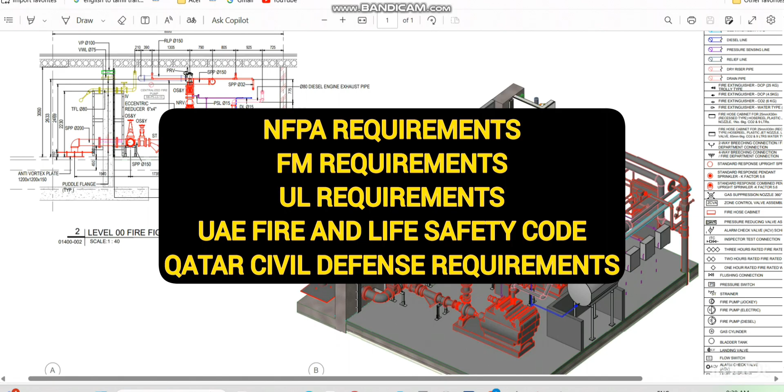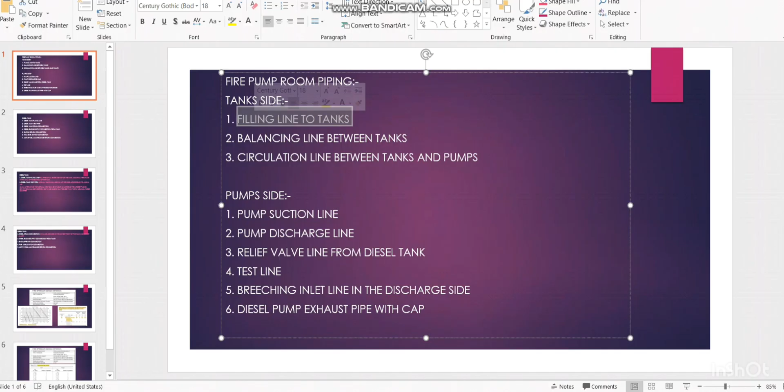When coming to the fire pump room piping, we normally find these type of different piping. For example, coming to the tank side, we have the water supply filling line which is given to the tanks and balancing line between tanks. So that means we have two different compartments, compartment 1 and compartment 2 for the firefighting tank. So in between two compartments, we have to provide the balancing line. The third one is a circulation line, and for example, the UAE normally provides the circulation pump between two tanks. So that is a special requirement.

And coming to the pump side, we have the pump suction line, we have the pump discharge line, and we will discuss all these things in detail. We have the relief line from the diesel tank, and we have the testing line. Then we have the breeching inlet line to the discharge side, coming from the fire department connection. Then diesel pump exhaust pipe with the termination cap.

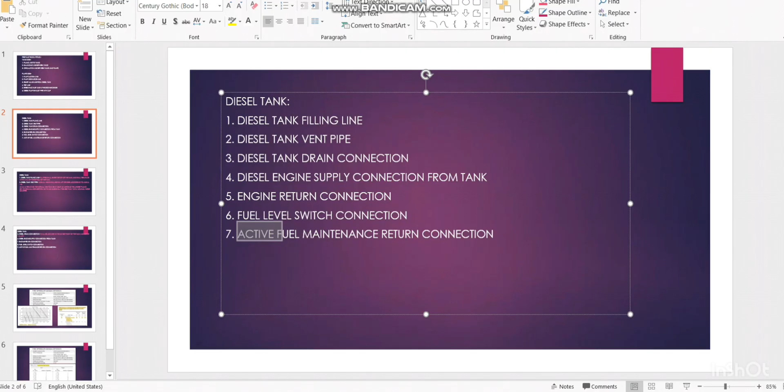And coming to the diesel tank, we have to provide diesel tank filling line to fill the diesel from outside. Then diesel tank vent pipe, diesel tank drain connection. Then the supply connection from diesel tank to diesel engine, and additionally we have the return connection. Then in order to verify the fuel level, we have the fuel level switch connection. Then active fuel maintenance, the return connection. So these are the 7 connections related to diesel tank, and additionally these are the 9 connections for the fire pump tank and pump side. So let's discuss each and everything in detail.

First, the fire pump room in this project comes under extra hazard group 2 because we have the diesel tank. If you see the density area curve from NFPA 13, for extra hazard 2, I have followed 0.4 GPM per square foot density for the sprinkler. For the hydraulic area, I have to follow 2500 square feet, and whatever sprinklers come in the hydraulic area I have to consider. But unfortunately, the fire pump room has only an area of 495 square feet, so I have considered whatever I have, with 0.4 gallon per square foot.

Coming to the type of sprinkler, I have followed only the standard response. I don't need the quick response sprinkler for this type of fire pump room. And K5.6, the normal one, I have followed. And the sprinkler rating 68 degrees Celsius I have followed, so I don't need to go with a higher rating like 79 and higher, because this is a normal pump room. There is no special requirement like cooking, where I would need a higher temperature rating. So here a 68 degrees Celsius normal sprinkler I have followed.

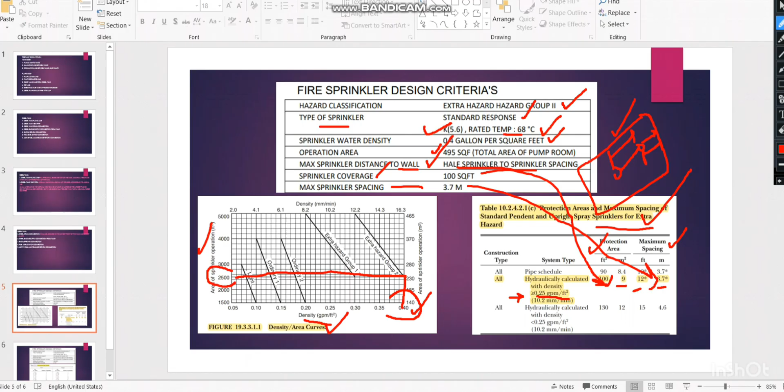And sprinkler coverage 100 square feet, as I mentioned here, I have taken the value from NFPA 13. Maximum sprinkler spacing 3.7 meters, that also I followed. So this one, you can see the density, it is more than 0.25 GPM per square foot. For this one I have referred, yes, of course, because we have Extra Hazard Group 2 where the density is 0.4, that's why I have referred this table.

So coming to the first one, filling line to the firefighting tank. So if you see in this drawing, you can see the yellow color line which is coming like this, which is coming from the outside from the water supply connection. So for the two compartments, this is compartment 1 and this is compartment 2.

So for both compartments I have a separate filling line, and in the filling line like you see here, we must have the water meter to monitor how much water is passing through the firefighting tank, irrigation tank, water supply tank, different tanks. So each tank must have the water meter line to monitor the water.

And second thing, here in the filling line you must provide the isolation valve to isolate this connection, and this is the minimum requirement for the filling line. The filling line should come from the outside water supply connection. So this is the first one.

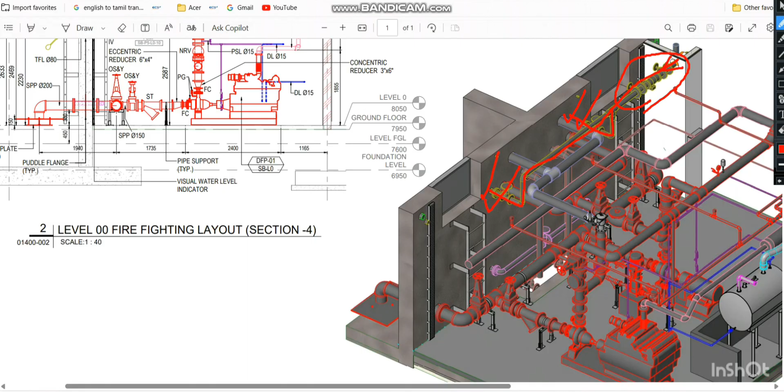So for the balancing line, you can see the connection here. So from here to here there is a balancing line. So it should have one isolation valve to isolate this one. So normally we have two compartments for the firefighting tank. As you see here, we have compartment 1 here, compartment 2 here. Between two compartments we must provide the balancing line, and this is what happened here.

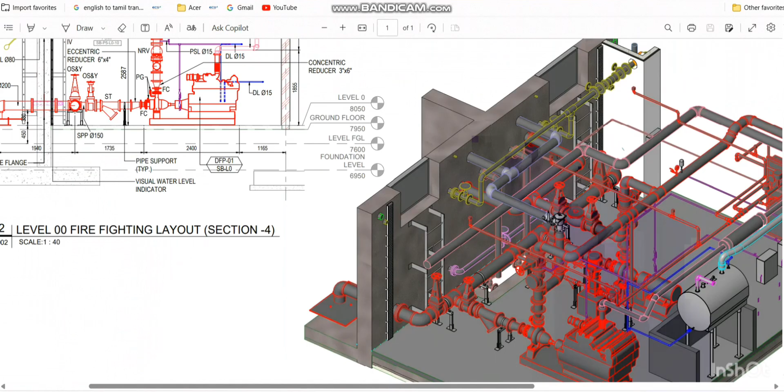And coming to the third line, it's a circulation line. So as I mentioned here, the circulation line between the tanks and pump. So normally this is the special requirement we follow in the UAE. So the concept here is we should have one circulation pump located here.

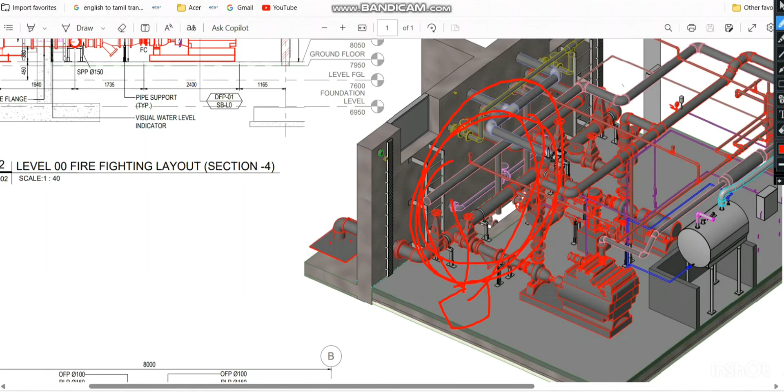From the circulation pump the line will go to the firefighting tank, I mean both the tanks, and also it will come back to the circulation pump. So this will be like a closed loop. It will circulate between the firefighting tank and the firefighting circulation pump. So this, as I told you, is the additional requirement in the UAE.

And there are a few more items we have to discuss about the firefighting tank. First, you can see in this project I have used the RCC concrete tank, with the two compartments. So normally we can use RCC concrete tank and GRP tank also. So as per NFPA we can select the concrete material.

So in the concrete tank you can see there are two water level indicators I have provided here. So inside, the water level indicator will be there to monitor the water level. Additionally the overflow pipe has to be provided. So if the tank is filled, I need to empty the tank, so the overflow line will normally come. So the overflow line for both the tanks we have to provide.

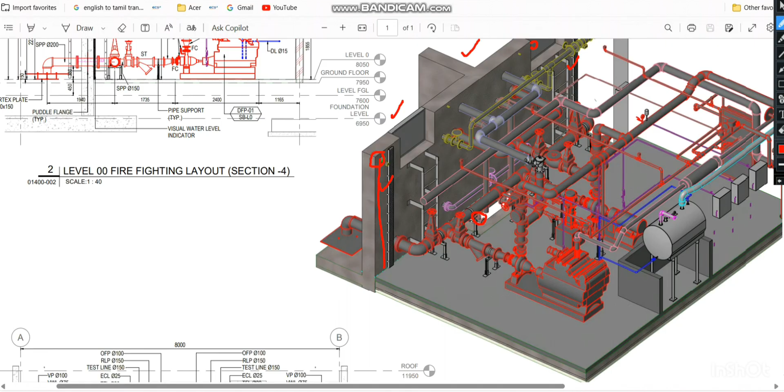So additionally we have to provide the drain line. Drain line you can see inside, like if I zoom here you can see this line. For example, here at this point from the bottom of the tank we have to provide the drain line. So like you see here, we have the drain line here for tank 1 and tank 2. So both the drain lines we have to provide here.

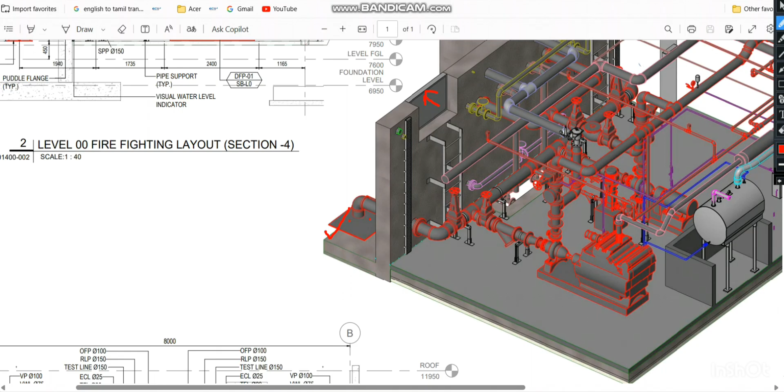And in the RCC tank we have provided the entry. So for both the tanks we have provided two entries from the side, and inside the tank you can see the anti-vortex plate. So the anti-vortex plate has to be provided to avoid the turbulent flow, because we have two types of flow, laminar flow and turbulent flow.

This turbulent flow must be avoided because this water is going to the fire pump. So in order to avoid this, I have provided the anti-vortex plate. After that this line is coming directly to the fire pump. Now we will see the requirement of firefighting pumps.

So when it comes to the suction line, the first thing you can see is the puddle flange. This is the wall, the concrete wall. So inside the concrete wall, on the suction side, discharge side, the balancing line, everywhere, whatever connection is penetrating into this wall, we have provided the puddle flanges. You can see this line, which is the puddle flange, indicated here.

And from the suction line, you can see at this point we have provided one OS and Y gate valve. OS and Y means outside screw and yoke. So that valve I have provided here. Visually you can see whether the valve is open or closed. That is the reason for firefighting we normally provide the OS and Y gate valve.

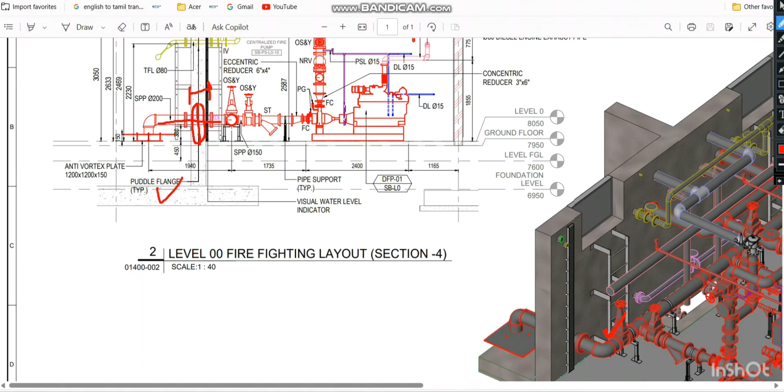And coming to the suction line, you can see here we have provided the OS and Y in the main header, suction header. After the suction header, we have three different pumps. The first pump you see is the diesel pump. After that, inside you can see this support and this pump, this is the jockey pump. And the third pump you see at this level is the electric pump. So we have electric pump, jockey pump, diesel pump, three combination we have provided here.

So first coming to the suction line, you can see here we have the OS and Y in the individual pipeline, and we have provided the strainer here. Additionally, you can see we have provided the reducer here. Normally we have two types of reducer: concentric reducer and eccentric reducer.

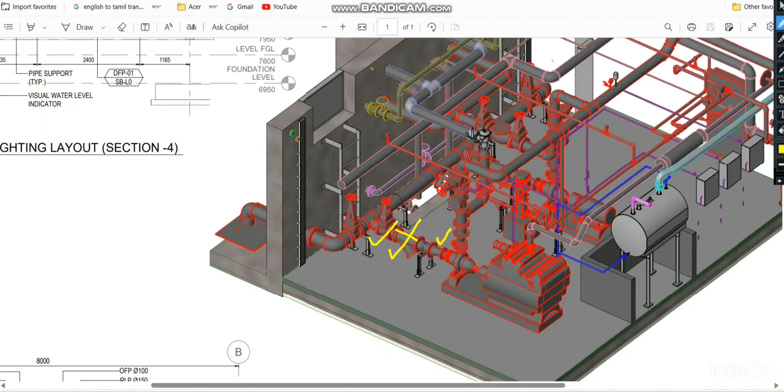The important difference between these two is, you can see in this image, the concentric reducer has a shape like this, with the reduced surface like this. And the eccentric reducer, on the top it will be a straight line. We must use the eccentric reducer in the suction line, because if you use the concentric reducer, there is a chance that air will be trapped at this point. So to avoid air trapping, on the top side we must have a flat surface. So the eccentric reducer is normally allowed in the suction side. But coming to the discharge side, it's not an issue. You can use either the concentric or eccentric reducer in the discharge side.

In this section drawing, you can see it for your clear understanding. Here we have provided the OS and Y gate valve. This is the main line header OS and Y gate valve. And coming to the branch lines to the individual pumps. First the diesel fire pump, you can see the marking DFP. That means the diesel fire pump I have provided.

So first in the branch line, I have the OS and Y gate valve. After that we have the strainer, and after the strainer you can see the eccentric reducer I have given here, 6 by 4 inch, because the pipeline is 6 inch and the fire pump connection is 4 inch. After that you can see FC, the flexible connection I have provided here. Additionally we have the pressure gauges, PG, in the suction and discharge.

Coming to the fire pump, here we have used the end suction top discharge pump. Normally we have 4 types of fire pump as per UL: the vertical turbine pump, end suction top discharge, vertical inline pump, and horizontal split case pump. In this project I have used the end suction top discharge horizontal centrifugal pump because of the orientation. And here you can see I have given 2 gauges.

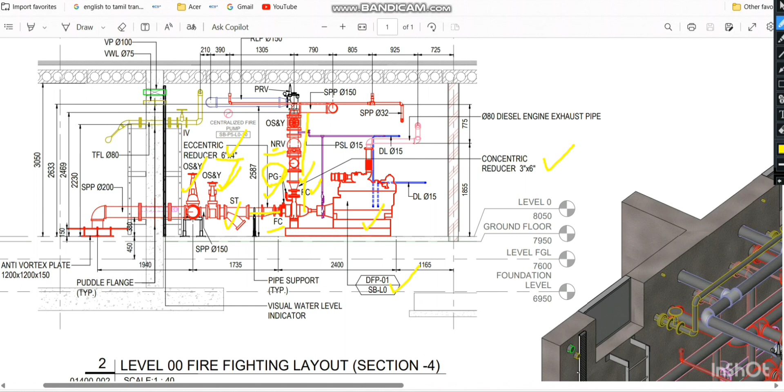So we have the NRV, meaning non-return valve or check valve, so the water should not come back to the pump after the discharge. So we normally provide the NRV, non-return valve, check valve. Then again we have the OS and Y gate valve in the discharge side.

So in this image you have a very clear view. The diesel pump, we have the discharge line which is coming here. We have the flexible connector and reducer, and here we have the check valve and OS&Y gate valve. And before that you can see this line which is going like this.

And here we have one special valve that is called a relief valve, and this line is called a relief line. This line has to go to 2 different tanks like this, so it is going to 2 different compartments. And this relief valve, how to size it, we can see now.

We have to follow NFPA 20 for the minimum pipe size. Only for the minimum pipe size we will follow this one. For the actual pipe size we have to perform the hydraulic calculation in the later stage. For example, in our project we are using a fire pump with 500 GPM.

So for the 500 GPM fire pump, the suction line has to be 5-inch pipe, and the discharge line has to be 5-inch pipe, and the relief valve, what I showed you now, has to be a 3-inch relief valve, and the relief valve line must be 5-inch. So the relief valve should be 3-inch and the relief valve line should be 5-inch. That means near the relief valve we have to provide the reducer like that.

And the meter device should be 5-inch. The meter device means it's a testing line. The testing line I will show you now, that should be 5-inch.

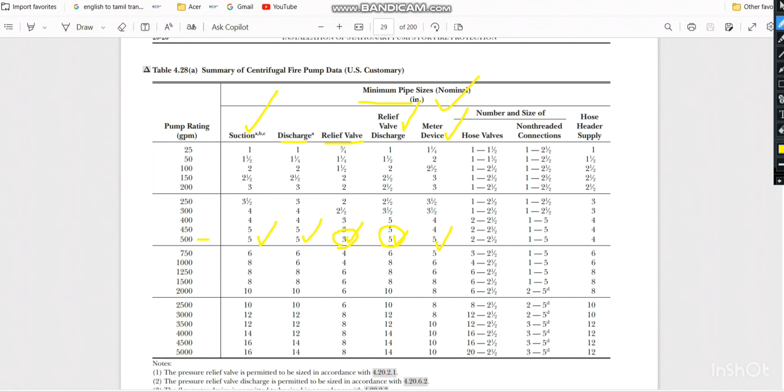So now we discussed the complete suction requirement for the diesel pump and the discharge side, all the accessories, and additionally this relief valve and the relief line. So all these requirements for the diesel pump we discussed. Additionally we discussed the filling line. Now we are going to the next one, that is called the jockey pump. In the jockey pump we will see all the special requirements.

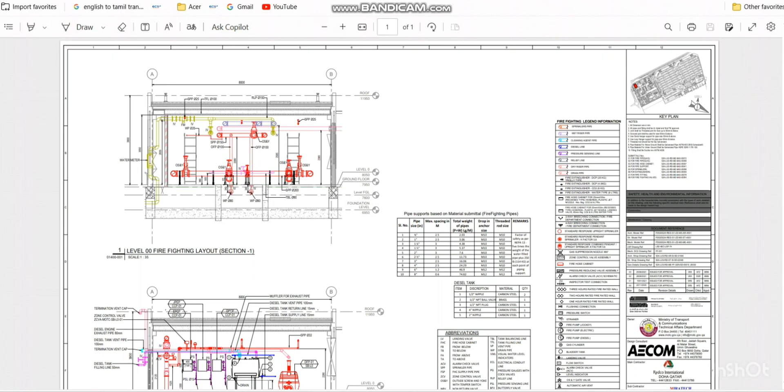So first coming to the top view, this is the top plan. Here you can see first this diesel engine we already discussed, and this is the relief valve and relief line which is going to 2 different tanks, that we also discussed. And coming to the next pump, that's a jockey pump. From this header you can see one line which is coming to this pump. This is called a jockey pump, and this is connected with the discharge header.

So in this line you can see the isolation valve we have provided. The isolation valve is located here, and as per the rule there is no need to provide the OS&Y valve for the jockey pump, because the jockey pump is not a fire pump. The jockey pump is just a pressure maintenance pump, so we don't need to provide the OS&Y gate valve for this jockey pump particularly. You can provide a normal gate valve for the jockey pump, but for the fire pumps, diesel pump and electric pump, you must provide the OS&Y gate valve.

So here we have provided the normal gate valve. After that we have the jockey pump, and it is connected with the discharge header. Again in the suction line we have the strainer and gate valve. In the discharge line we have the check valve and the gate valve. So this is connected with the discharge side of the header.

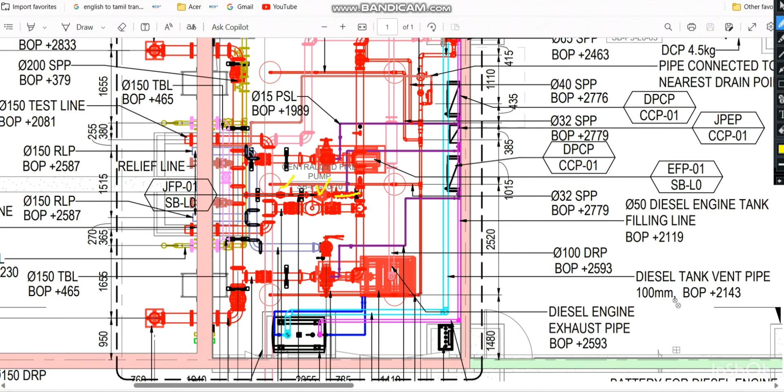So coming to the third one, an electric pump. From the suction header we have taken the same line, and here in between you can see the OS&Y gate valve. Again we have the same arrangement. We have the reducer, we have the flexible connector, and this is the electric pump. In the discharge side we have the flexible connector, and additionally we have the check valve and gate valve.

So you can see it in the key plan also. Here you can see the same arrangement, and we have the connection like this. Here we have the OS&Y gate valve, and the reducer here is an eccentric reducer, and the flexible connector, and the pump, and in the discharge side we have the flexible connector, and again we have the check valve and the gate valve.

It is connected with the discharge header, and we have one special rule in the fire pump room piping. For example, if you see here, from this tee to the suction side flange, this distance must follow 10 times of D. So this rule must be followed. This is as per NFPA 20.

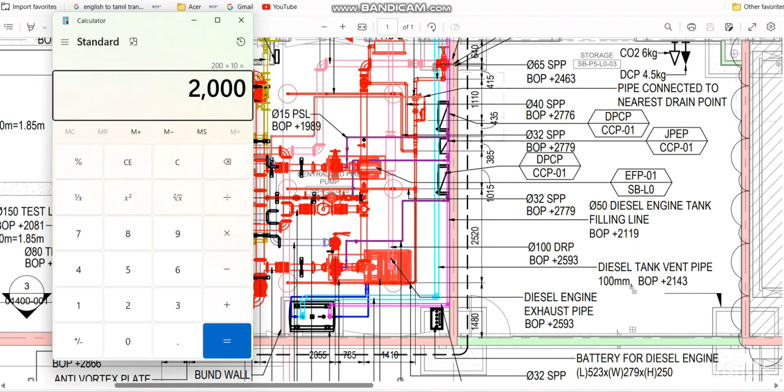For example, on your suction side your piping is, just for example, 200 mm. So you have to follow the rule: 200 mm into 10 times. So you have to provide 2 meters of straight pipeline on the suction side. That means from this tee flange to the pump suction flange, this length must be 2 meters. The 10 into D rule you have to follow for the fire pumps.

Okay, and the next requirement: now coming to the discharge header, since we have finished the suction side. You can see the diesel pump which is connected with the discharge header, and also the jockey pump coming from the bottom which is connected with the discharge header, and also the electric pump. This line is also connected with the discharge header. All this discharge header line is going to serve the system.

It will go like this to the underground, and from the underground it is going to serve 10 different buildings located far away. This is called a service building. The fire pump is located in the service building, and from here it is serving different areas. Normally for residential and commercial areas the fire pump room is located on the ground floor, and from there it will serve the upper floors. In this project we have a common room because it's a very big project. From here it is serving different areas.

In the discharge header the main thing is, you can see this line, this is called a test line. Testing line means we have the flow meter here. In the flow meter we have two isolation valves on the front and back side. If you want to do any maintenance on the flow meter, you can isolate these two valves and do the maintenance. This testing line is distributing further and is connected with the two tanks like this.

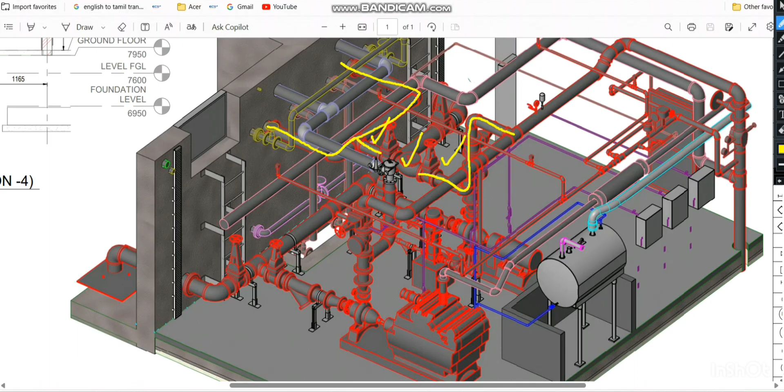The important thing is, here in the section drawing you can see how much coordination you have to do with the civil team to provide proper openings, I mean the puddle flange openings and all these things. Starting from here we have the suction pipe. We have two suction pipes shown in the image with the anti-vortex plate, and additionally from the top you can see the TFL line. TFL means tank filling line, which is coming from the water supply. We have two tank filling lines, and we also recently discussed the testing line.

We have two testing line branches coming from the discharge header, and after that we have this line, called RLP. As I told you, RLP is the relief line pipe, which is coming from the diesel pump. There are two different branches for the relief line pipe, and also OFP. OFP is the overflow pipe. We have to provide the overflow pipe for the two tanks.

This is the OFP, overflow pipe, and here we have given the vent pipe connection. Additionally we have the drain connection: WP is the waste pipe drain connection. All this must be provided in the tank, and it will be properly coordinated with the civil team.

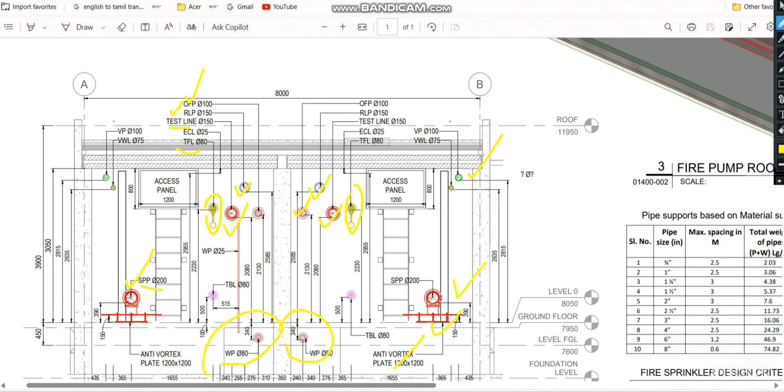Here additionally we need to see one more pipeline, in this color. This is the diesel engine exhaust pipeline, and this arrangement is called a muffler. The diesel engine exhaust pipe will normally go outside for termination, and on this exhaust pipe we have to provide insulation also. Normally we provide rock wool insulation. For example, if you see in this section drawing, you can see it at this point.

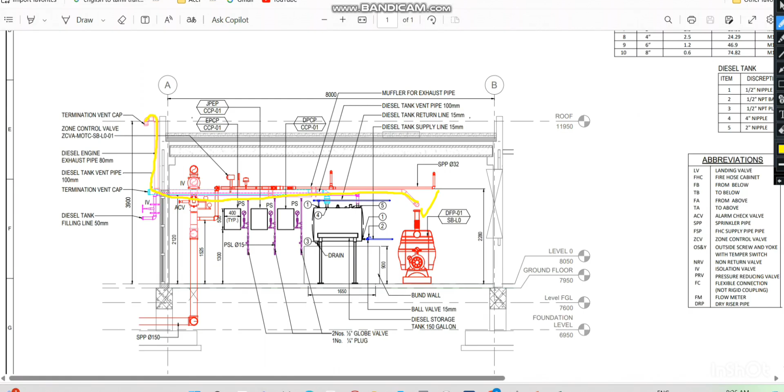So from the diesel engine we have this exhaust pipe which is going outside and going up, and which is terminating like this, with a terminating vent cap. So this line has to be provided only for the diesel engine.

And coming to the next important arrangement, we are going to see this line, the different line which is going like this to the controller. So this is for the diesel pump, and coming to the jockey pump also we have this line, and also the electric pump, this line. So all these three lines are going to different controllers. This is for the individual pump controller. So we will see some extra details about this controller.

So like you see in this section drawing, it is very clear that this line which is coming from the fire pumps and jockey pump is connected with the individual controller like this, and in each controller we have the PS, that is called a pressure switch. And in this section drawing, you can see some additional requirements. First I will open the NFPA 20 requirement, then we will come to this one.

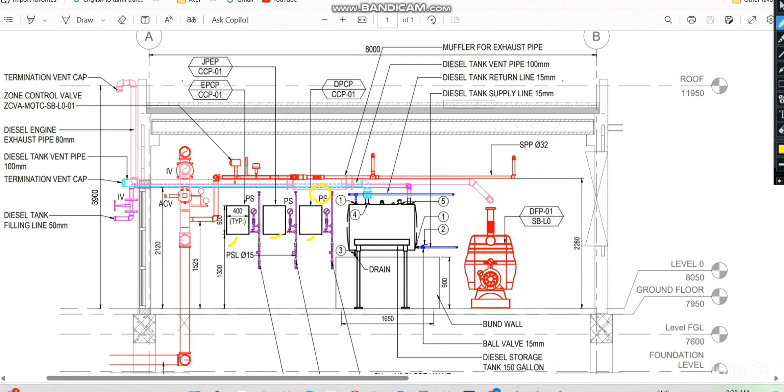So as per NFPA 20, for example, this is the suction side of the pump, this is the discharge side which is going to the system. So this is the OS&Y gate valve, and we have the check valve here. So we must provide the sensing line in between these two valves, in between the OS&Y gate valve and check valve. We should not provide the sensing line after the check valve. It should be always between these two valves.

So from the sensing line, like you see here, we have to provide two check valves. So this is the first check valve and this is another check valve, and between the two check valves the distance must be not less than 5 feet. So minimum 5 feet distance should be there on the sensing line, and the sensing line goes further to the controller, and the controller must have the pressure switch.

This is the control panel, and on the control panel bottom side you can see some special requirements like you see here and here as well. So there should be two globe valves. This is the first globe valve, this is the second globe valve, and additionally here also two globe valves. Also we have a 1/4 inch or 6 mm plug, at this point and also this point. So these are the special requirements for this system.

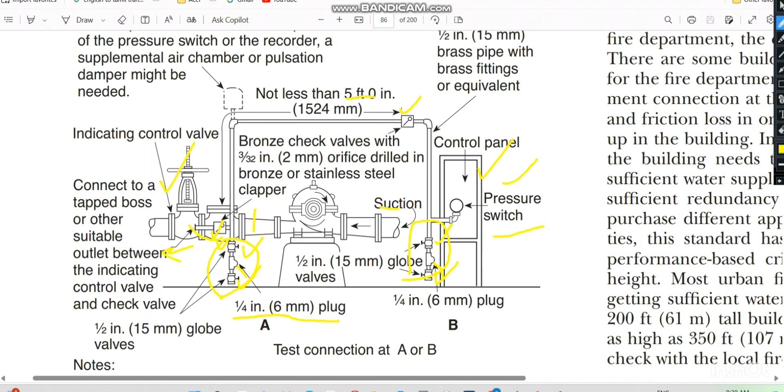Then coming to the pressure sensing line material, as per NFPA 20, the pressure sensing line shall be brass material, or it should be rigid copper type K, L, M. So K, L, M is an American based one. If you go to the British one, you can see X and Y. Based on underground and above ground, we use X and Y in the British standard. Coming to the American standard, for copper pipe we normally classify type K, L, M. Based on underground and above ground, the thickness also will change.

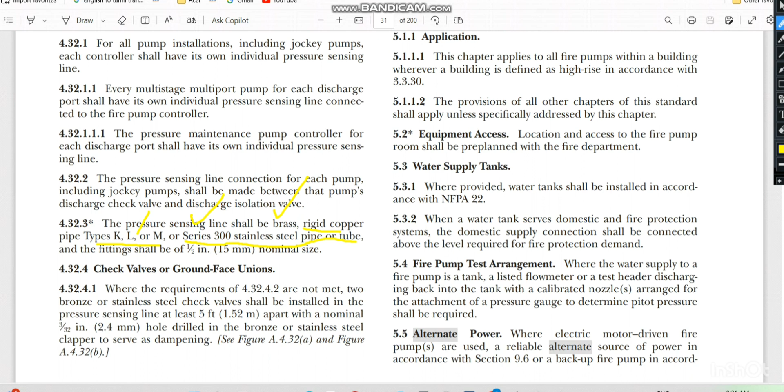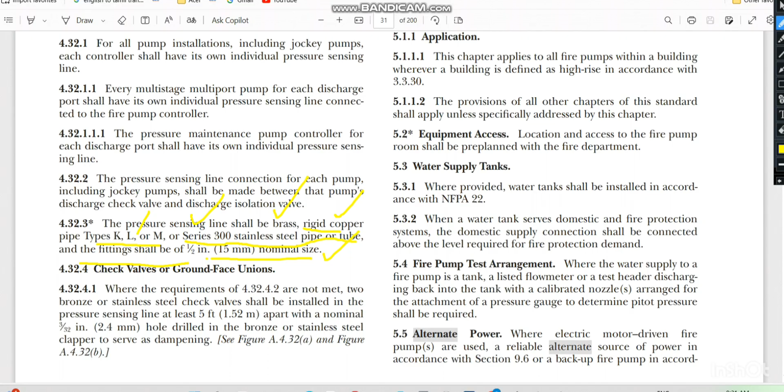And otherwise, you have to use series 300 stainless steel pipe or tube for the sensing line. And the fitting shall be a minimum of, normally, 15 mm nominal size for the sensing line. We are not allowed to use flexible copper. That is what we normally use for the DX split unit in our home. That type of copper is not allowed. Only rigid copper is allowed for the sensing line. So these three materials you have to choose from for the sensing line.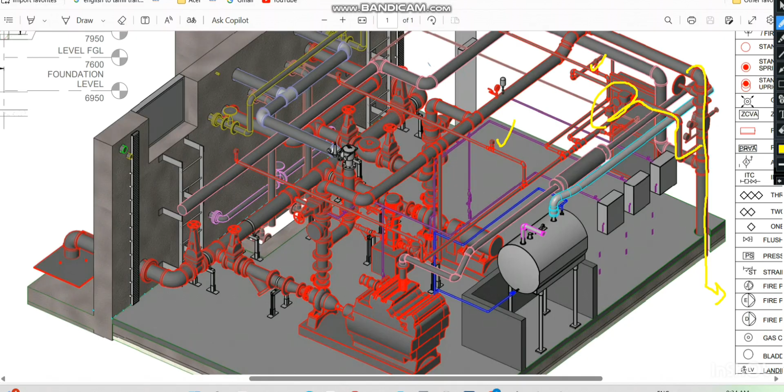So going further, as you know, with Factory Mutual (FM) or UL, there are different code requirements the fire pump room or firefighting equipment has to comply with. So we have some special requirements from Factory Mutual. Factory Mutual says don't use the pump room or pump house for storage purposes. That's a special requirement from FM. And provide automatic sprinklers over the engine driven pump.

So this is the special requirement from the Factory Mutual. We have to comply. So that's the reason normally we provide the sprinkler system for the fire pump room. So this one they clearly mention automatic sprinkler has to be provided over engine driven pump. So we have the engine driven pump here, diesel engine pump. So we are providing the automatic sprinkler.

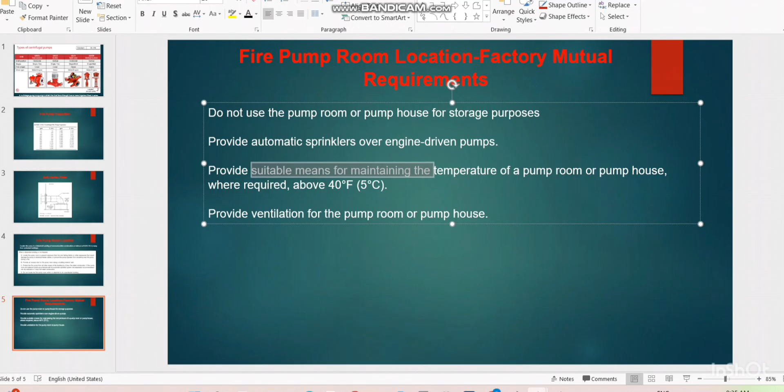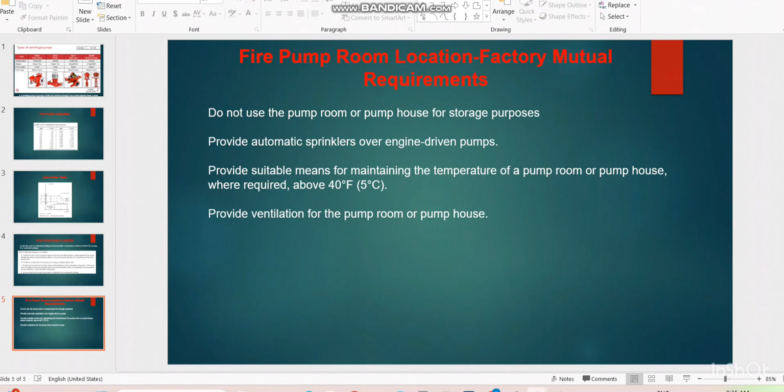Provide suitable means for maintaining the temperature in the pump room above 5 degrees Celsius. So minimum 5 degrees Celsius and above should be maintained for the fire pump room. Provide ventilation for the pump room and pump house. So we have to provide the mechanical ventilation for the fire pump room. So these are the special requirements we have to comply with.

And coming to the UL requirement for the fire pump, normally we are following UL 448 requirement for the fire pump. So we have to select the fire pump only from these 4 cases. For example, I am using here the end suction top discharge pump. This is the pump I am using for this project, and this is normally used for the lower flow range. For the higher flow range, we have to use these two types of pump, whether it is a vertical turbine pump or split case pump I can select.

And coming to the stages, that means the number of stages for the impellers. So it's single and two, that means single impeller, double impeller which is connected in series. Coming to the split case, we can go with multiple impellers, multistage is also allowed there. So this pump which I am using here is allowed to use for the motor or engine. That means I can use the same pump for the electric pump and for the engine pump.

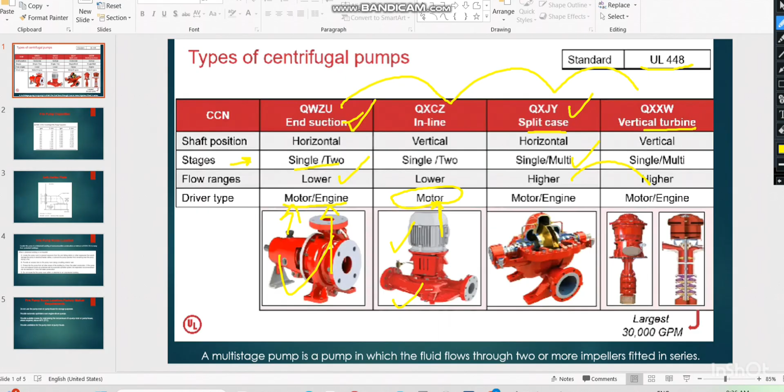Coming to the vertical inline, I am using the jockey pump in this project. Normally we are using vertical inline jockey pump. The jockey pump is not allowed to use with a diesel engine. It can be used only for the electrical drive, not allowed for the diesel engine. So as per UL also we have to comply when we go for the selection of the fire pump.

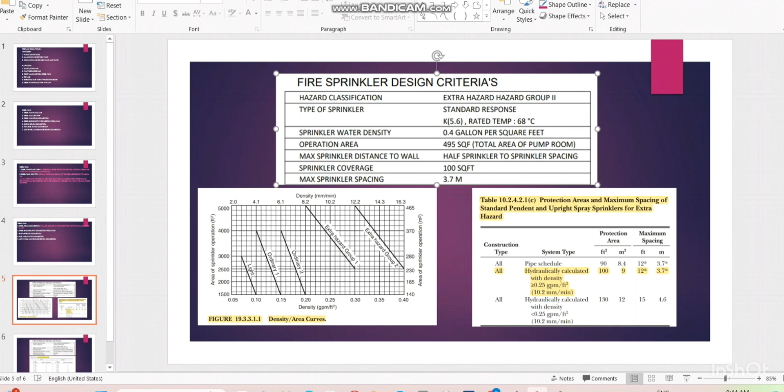So in this fire pump room, I have provided the zone control valve for the fire sprinklers, and the maximum spacing, minimum spacing, as I mentioned at the start of the video. I have followed this requirement, maximum spacing and the protection area and the sprinkler density, all these things I have followed per this special requirement.

And moving further with the next one, you can see one more line which is connecting with this main header, which is going further to the outside. So this line is the breaching inlet line, you can call it fire department connection also. So the fire department connection I have provided here, and from here I have taken the line like this, which is finally connecting with the discharge header line. So in regards to fire department connection, you have to understand a few things.

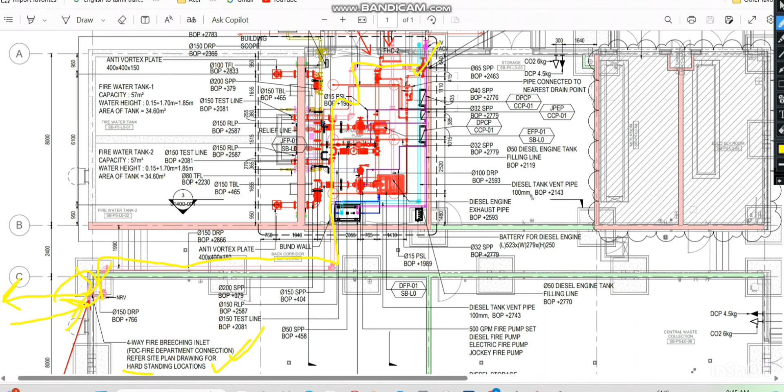First of all, when you go for the overall layout, you have to make sure that the distance between the fire department connection and the fire engine area does not exceed the NFPA requirement. For example, here I mentioned that fire department connection refers to site plan drawing for hard standing location. Hard standing means fire engine standing location. So in the overall site plan, you have to coordinate the location for the building's fire department connection. The distance must not exceed the NFPA requirement.

And additionally, if you see the UAE Fire and Life Safety Code, they have some special requirements, like a breaching inlet shall be provided for the building active system. So a separate dedicated breaching inlet located within 18 meters of fire truck parking. And this point is very important, it shall be provided directly to the fire water tank. So for the fire water tank, there should be a separate breaching inlet we have to provide.

So this drawing which I explained here is based on the Qatar Civil Defense. As per the Qatar Civil Defense requirement, in this drawing I have provided the breaching inlet like you see here.

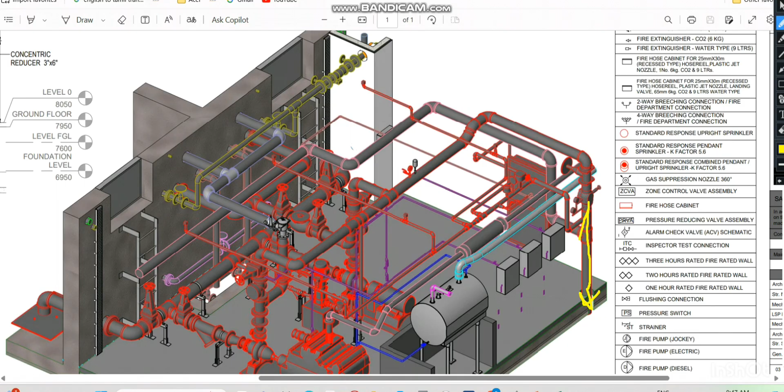I have provided the breeching inlet directly connecting with the discharge side. Okay, so I'm coming to the UAE. Along with the requirement mentioned here, we have to follow some additional requirements also. Like they mentioned here, we have to provide separate breeching inlets for the wet riser and sprinkler riser, in addition to the tank requirement.

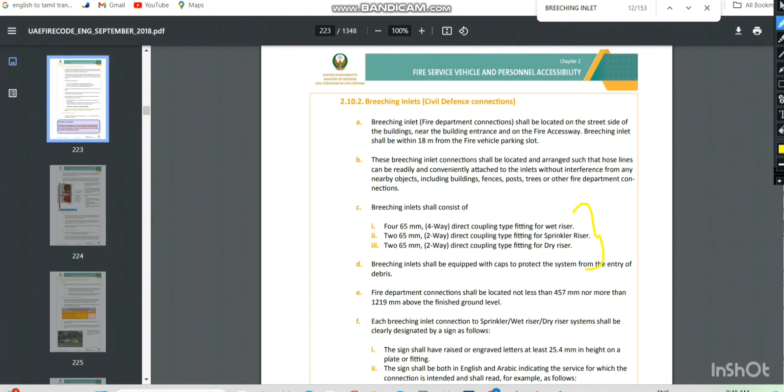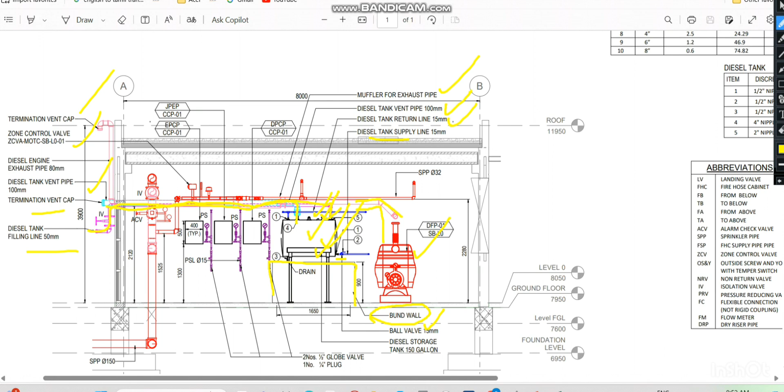In addition to that, we have to provide the bund wall. You can see here there is a bund wall I have shown. We normally provide a bund wall so that if there is any leakage in the diesel tank, the diesel will not go outside the fire pump room. It will be collected in the bund wall itself. So we are providing the bund wall for the diesel tank. You can see here this bund wall I have provided.

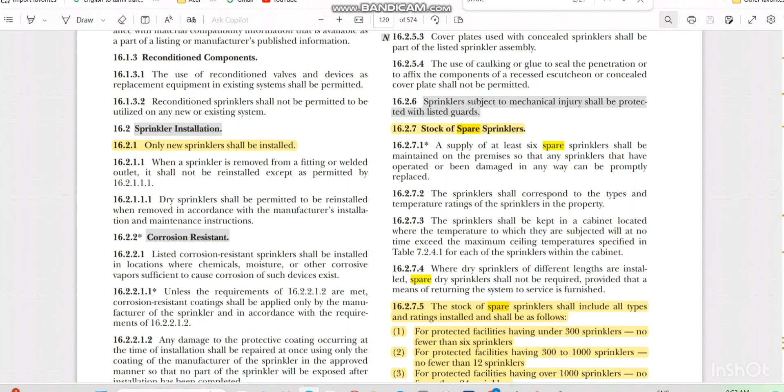And finally we have to see one more thing, that is the spare cabinet. As per NFPA 13 and NFPA 25, we have to provide the spare cabinet for the sprinkler system. If your project has under 300 sprinklers, you have to provide minimum 6 spare sprinklers; with 300 to 1000, minimum 12 sprinklers; and with more than 1000 sprinklers, no fewer than 24 sprinklers. These are the spare sprinklers you have to provide.

In addition, there is a special requirement if you have different sprinklers, like pendant, upright, and sidewall sprinklers. This requirement has to comply to all the individual sprinkler types. That means if you have 300 pendant, 300 upright, and 300 sidewall sprinklers, you have to provide not less than 6 spares of each in the spare cabinet in the fire pump room.

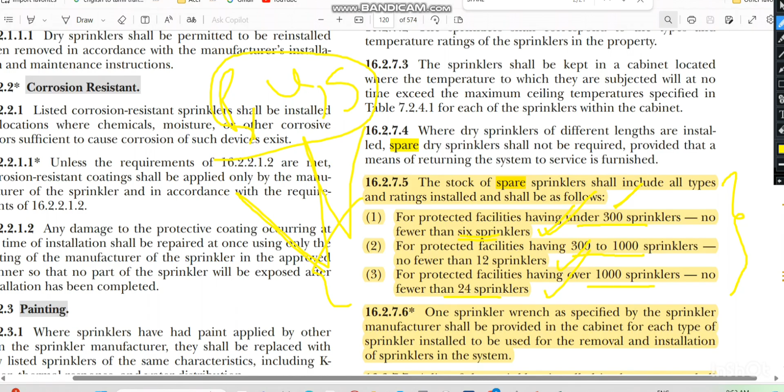So I believe you got some clear understanding of the fire pump room.